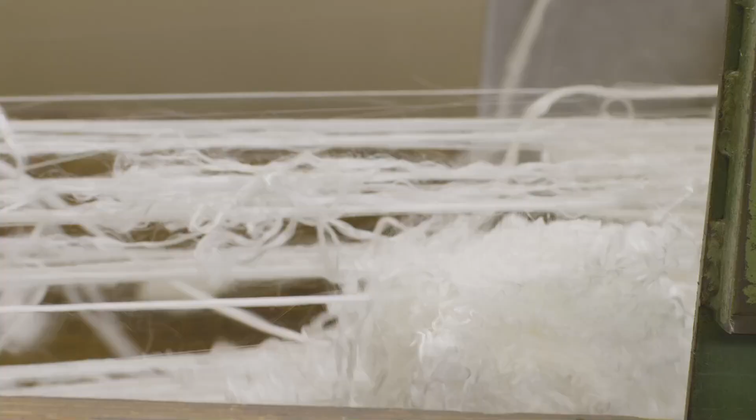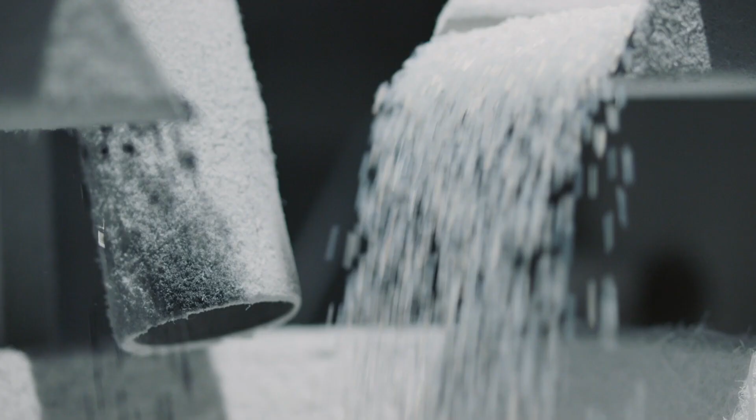Here at RadiciGroup, sustainability is right at home. All the activities of the RadiciGroup specialty chemicals, high-performance polymers and advanced textile solution business areas are carried on with full respect for the environment, people and communities. The group has a worldwide presence with 3,000 employees and more than 30 production and sales sites that produce materials for numerous markets, including automotive, electrical, electronics and textiles.

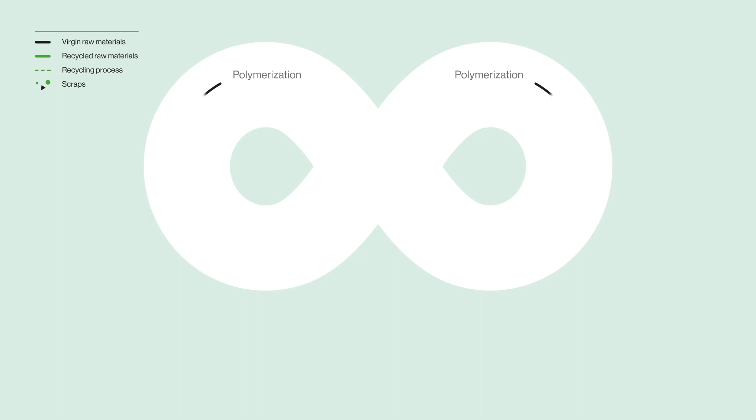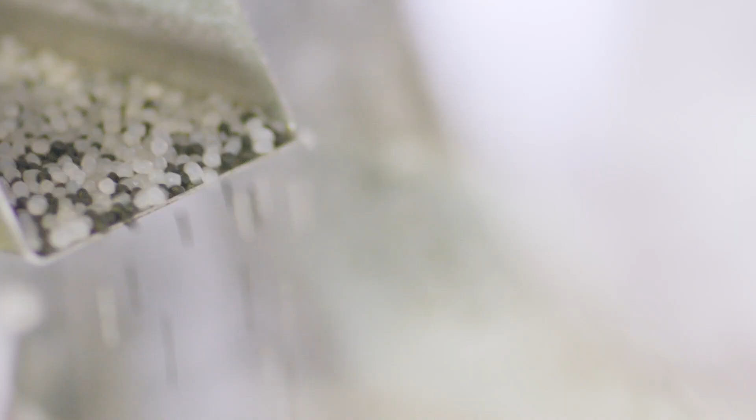Every single day, we work hard to make the circular economy our business model, by optimizing processes, reusing scraps, and promoting recycling, and we always measure our performance. Through our annual sustainability report, we publish on our economic, environmental, and social performance in a transparent and objective way. In the last 10 years, we have reduced energy use by 17.5%, CO2 emissions by 61.5%, and water use by 8.6%. And we're not going to stop here.

We will continue to team up and optimize supply chain synergies for a circular and sustainable future. And that's why we are part of the European Car EService project.

The Car EService project has received funding from the European Union's Horizon 2020 program. The goal of our project is to develop innovative circular economy business models for the automotive industry. In particular, we have focused on reuse, recycling and regeneration of some key components coming from end-of-life vehicles.

RadiciGroup high-performance polymers is the only producer of engineering polymers participating in the Car EService project, which is coordinated by the National Research Council of Italy.

We have performed quantitative feasibility studies on polyamide recovered from automotive components. The parts have been dismantled from the end-of-life cars, properly treated and then recompounded.

The aim of the project is to produce engineering polymers using secondary raw material obtained from the end-of-life parts and to obtain the performance comparable to that of engineering polymers made with virgin raw materials. Potential uses include high value-added engineering application with high end-of-life recyclability.

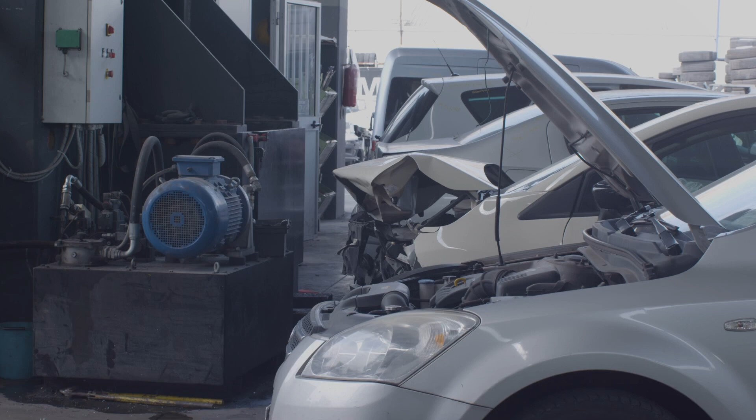The first step was to identify the components to be tested for recovery. We had to find the right compromise between polymer quality, dismantling ease, cleanliness, and the need for metal parts separation. Our choice fell on airbags and wheel covers, both of which are made from polyamide.

To validate the process and determine if it could be used for other thermoplastic polymers, we also considered rear wipers and door handles, which are components made primarily of PBT and PET polyester polymer.

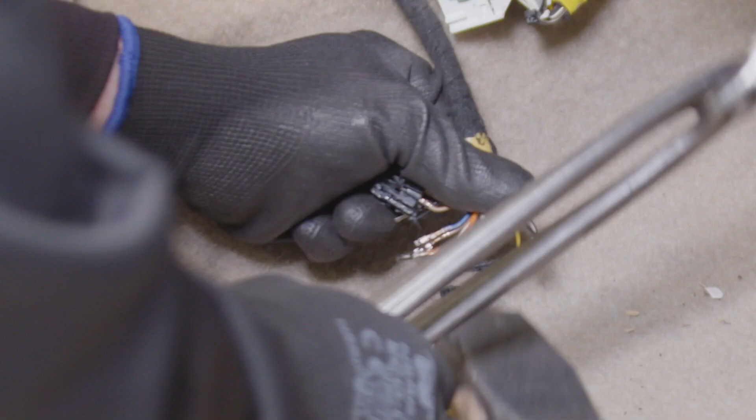Then, to handle the dismantling and stockpiling of the selected components, we hired Pollini, a company in Brescia. Pollini is a specialist in the dismantling of cars and a partner of FCA Stellantis, another group participating in the Car EService project.

Airbags are dismantled using a device that detonates the explosive charge to release the gas inside the airbag. Next, the dismantler takes the airbag out of the vehicle and places it in a special container.

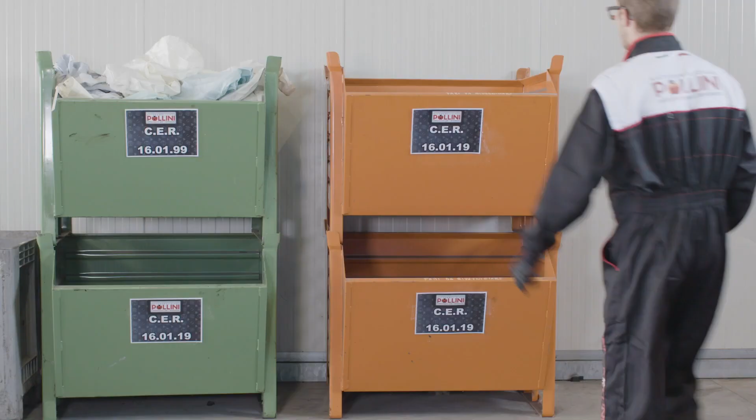The other components are taken apart manually and also placed in special containers. Then, the components removed from the vehicle become the material from which the post-consumer recyclate will be recovered.

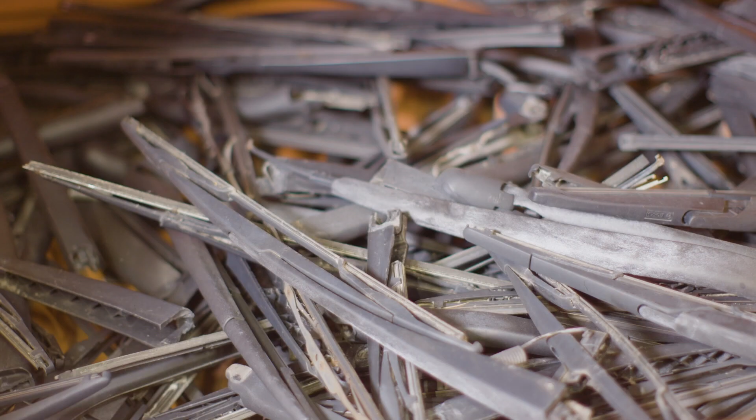A total of 1,000 kg of airbags, 1,000 kg of wheel covers, and 50 kg of rear wipers and external door handles were collected.

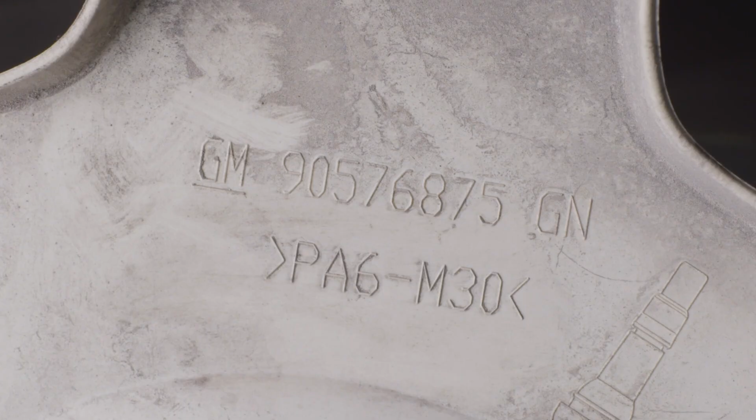The next stage is to sort the components according to the type of polymer. The composition is indicated on the part marking. Airbags are made of 100% polyamide 6,6 fabric, but wheel covers can be either polyamide 6,6 or polypropylene. Both are reinforced with glass fiber and mineral fill.

External door handles and rear wipers are usually made of glass fiber reinforced polyesters. The recycled components are cleaned of metal parts, then washed with pressurized water and degreasing detergent, and finally dried. Grinding is the last pretreatment process needed to make the material ready for recovery.

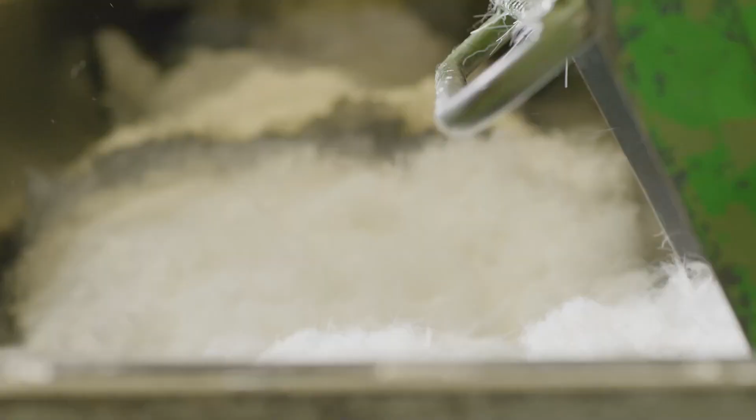Now, an industrial process enters the picture to manufacture the post-consumer recycled engineering polymers. The group can count on a production plant that is 100% dedicated to the production of sustainable, high-performance engineering polymers. Here, the circular economy concept has been implemented for years, and 100% renewable source energy is used to power production.

The material, ready for recovery, is stored in the raw material warehouse. From here, material samples are taken for quality control.

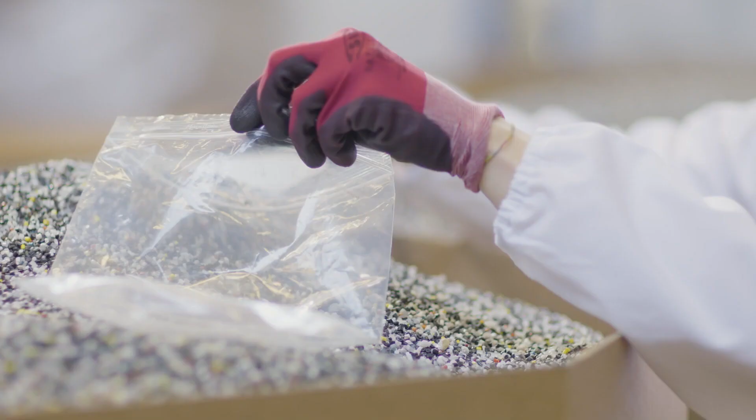Material characterization is performed to determine the type of polymer, its viscosity, the reinforcement material content, and the humidity. These characteristics are analyzed to select the optimal process condition to obtain secondary raw materials.

Based on the properties of the input material, a new material is formulated. This means our recipe is created with all the needed ingredients: the percentage of polymer, the type and percentage of reinforcement fill, and the additives. The objective is to obtain a product that meets the function and performance requirements.

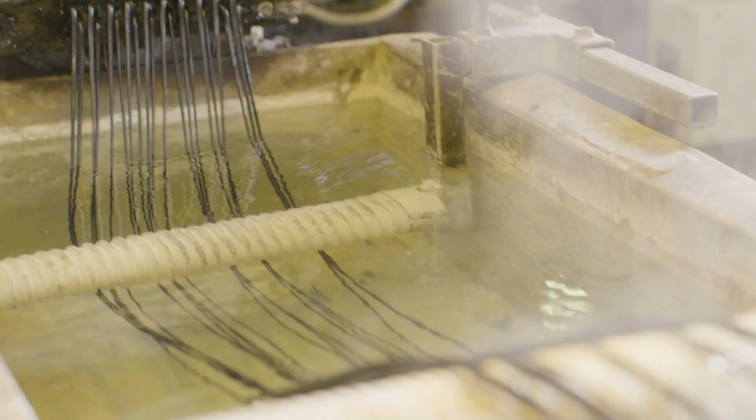This formulation is done by the specialized engineers and technicians of the RadiciGroup Research and Development Department. Regarding the airbags, we have also determined the types and quantities of additives to be added to the base polymer, taking into account the presence of silicone on the airbag fabric.

Silicone is not compatible with polyamide, and thus it is necessary to dilute the percentage of silicone by running a preliminary extrusion of the material.

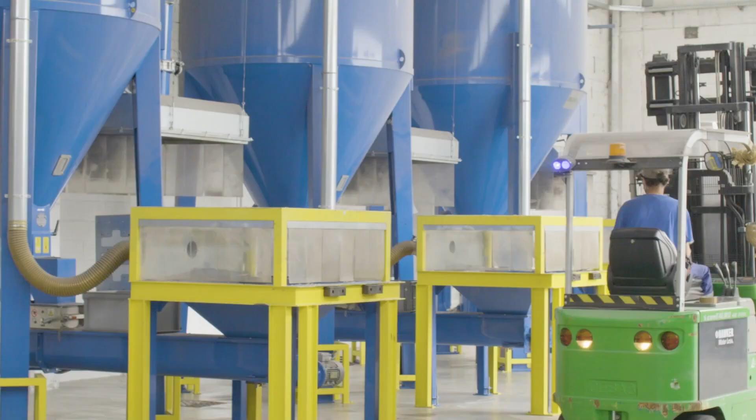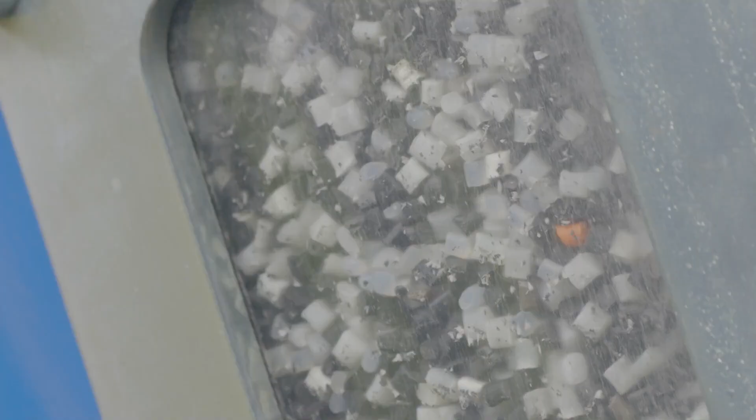The first stage of the production process is mixing. The polymer bases are loaded into silos and mixed with a mechanical system to homogenize the material. This ensures the quality and consistency of the chemical and physical properties of the finished materials.

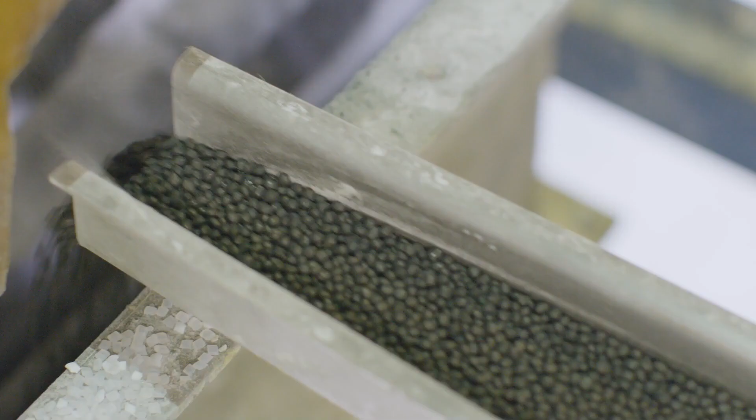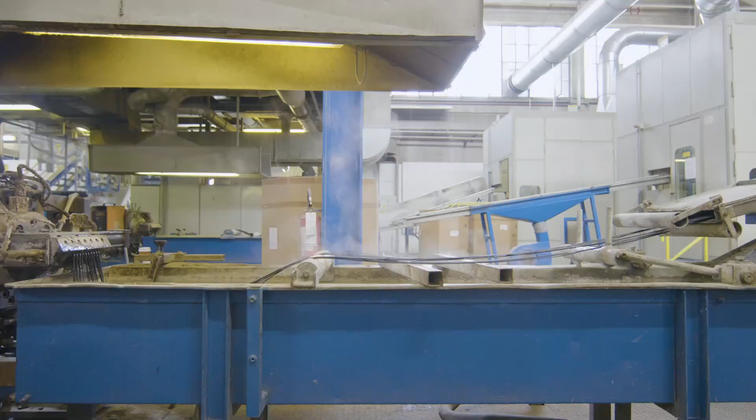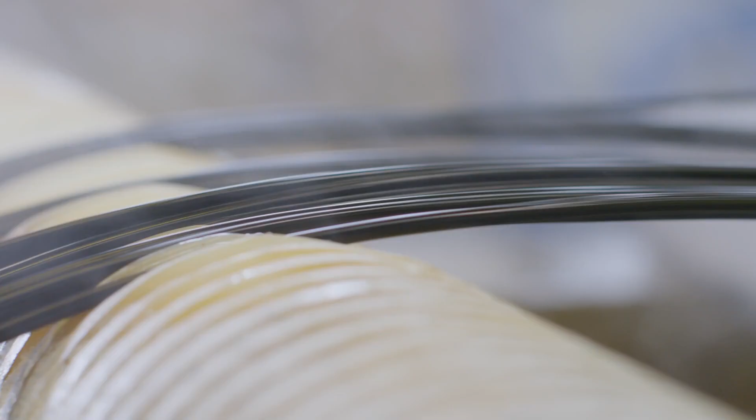The polymer mix is transported by pneumatic systems to the dosing units positioned above the extruder. According to the formulation, the dosing units feed the polymer, additives and reinforcing materials into the extruder, where they're all mixed together. In the extrusion process, the materials are forced through small holes to form threads or spaghetti.

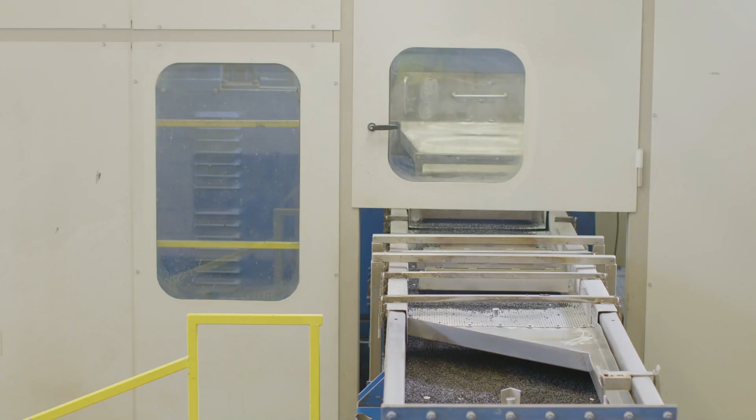These are then cooled in water baths, dried, and cut into small cylinders called chips. Next, the chips are transferred into storage silos, where they remain until they are packed.

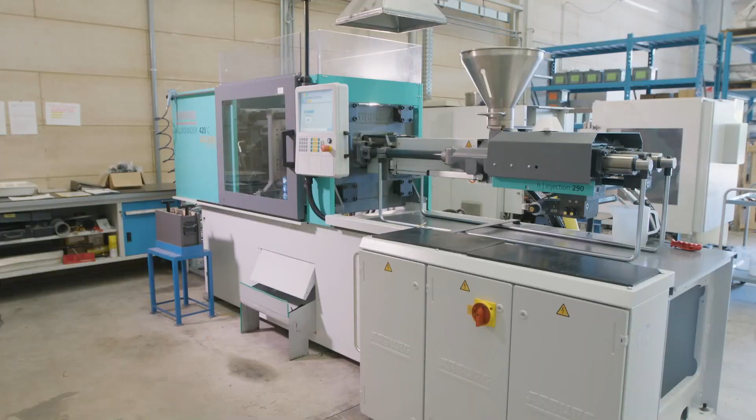Our laboratories perform two main kinds of activities. Firstly, analysis of the finished product for quality approval and release of the product for sale. Secondly, characterization of the physical, chemical and mechanical properties of the material and the preparation of a technical sheet, which can be used by end-user developers.

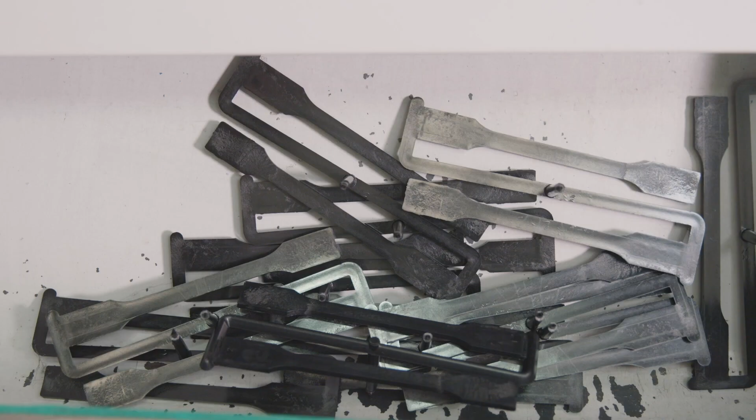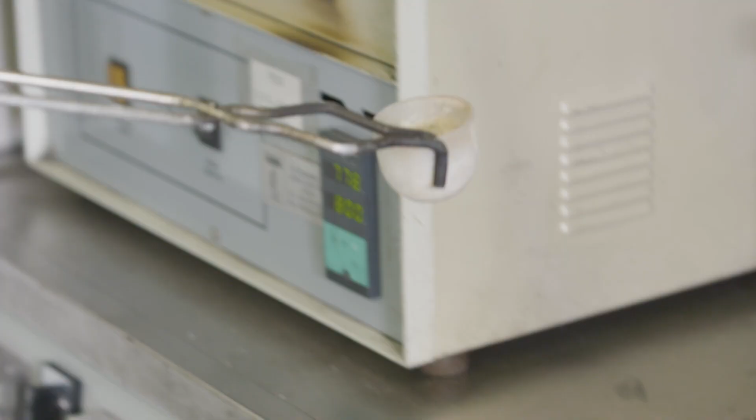Testing is performed directly on chips or on standard specimens, which are prepared by injection molding. Tests carried out are testing for residual moisture content in granules, analysis of ash content to determine filler content, and characterization of mechanical properties: tensile, flexural and impact strength.

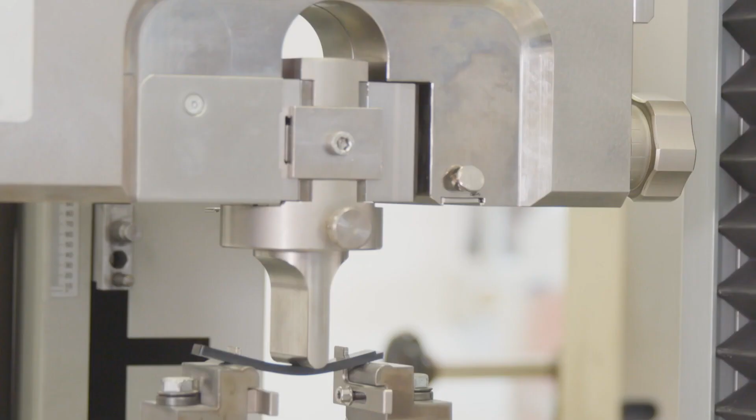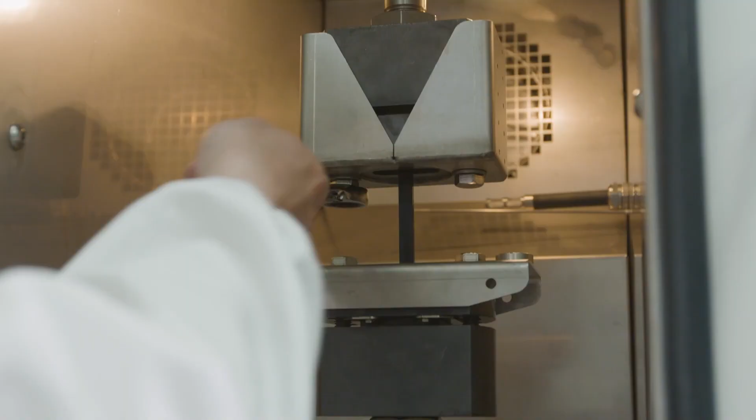For the EService project, we have equipped our laboratories with a new test instrument for fatigue characterization of materials. Fatigue testing is performed by subjecting the specimen to a variable load until failure occurs, taking into account the number of cycles.

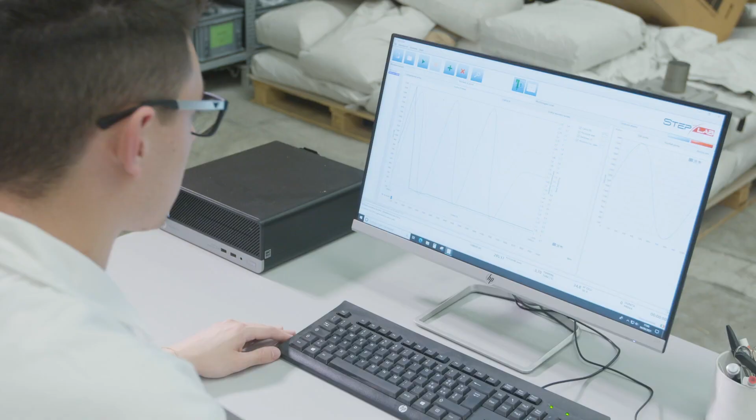After passing quality control, the materials produced are transferred to the packaging area. Packaging options are bags, octobins or tanks.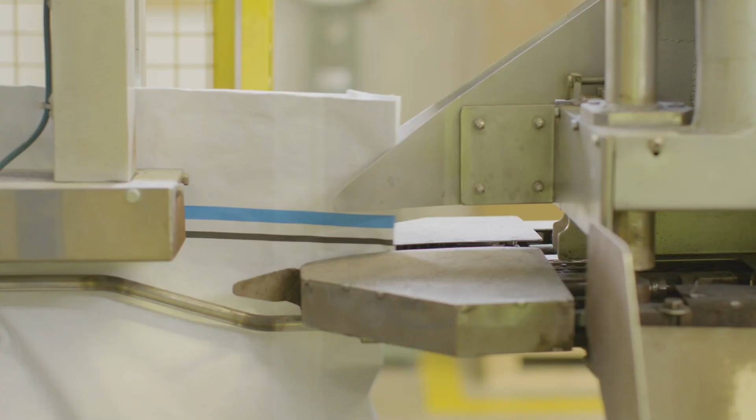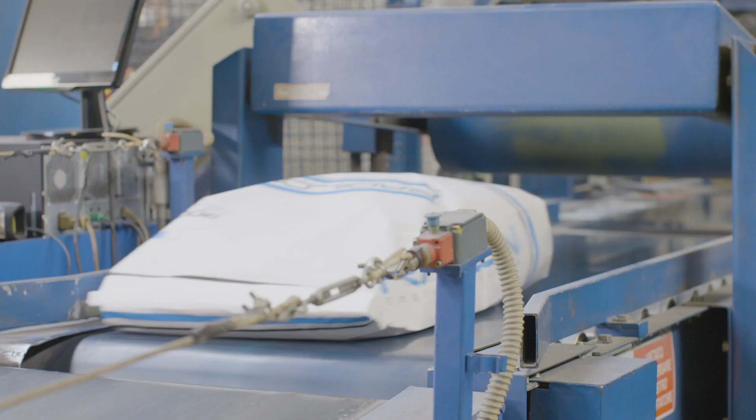Bag packaging is a fully automated process. The bags are hermetically sealed to prevent the escape of granules and to protect the material from moisture. The bags are then stacked on pallets and shrink-wrapped, ready for shipment.

RadiciGroup formulates, produces and characterizes engineering polymers so that its customers can process them into products with specific functions and performance requirements. There are many different processing technologies, application sectors and intended uses.

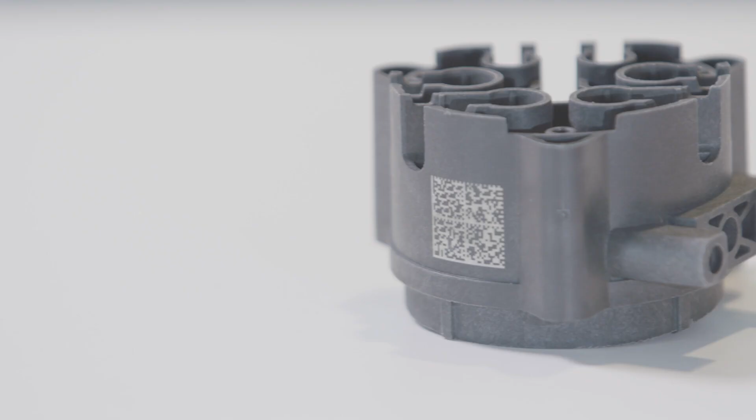For the EService project, we consider two processing technologies. The first is injection molding, a classic technology for engineering polymers, which involves injecting the polymer melt under high pressure into steel molds that are held tightly closed by a press.

The other technology is 3D printing, which offers almost total freedom in creating complex shapes without fixed costs for tooling, such as molds or the like.

With the cooperation of some of our customers, a number of products were selected to test the processability and performance of the materials obtained from post-consumer recycling.

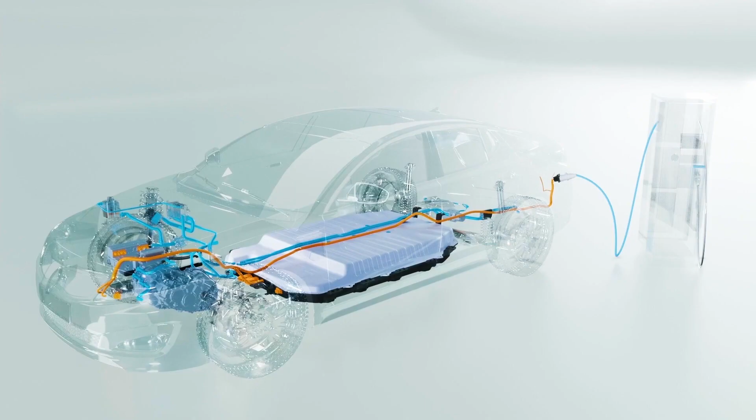The products manufactured for the EService project include both electrical device components and automotive parts, for applications such as charging connectors for electric and hybrid vehicles, as well as mechanical components specifically developed to carry out validation tests.

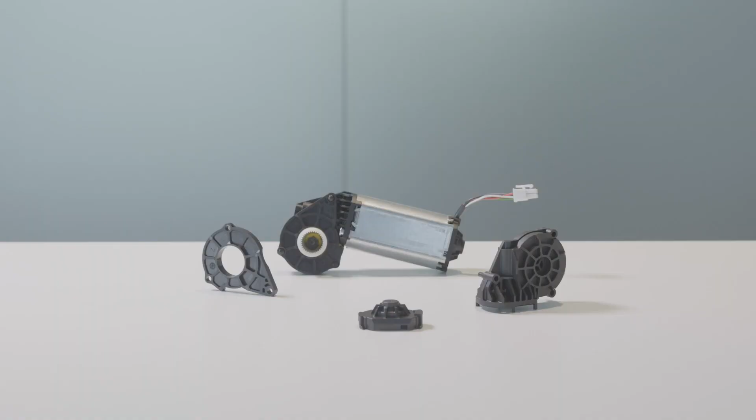The processing of the material and the use conditions under which the end product will operate during its life cycle are aspects of a complex puzzle. To work well, everything must be carefully designed and rigorously checked. This will ensure that the delicate balance among the parameters is preserved.

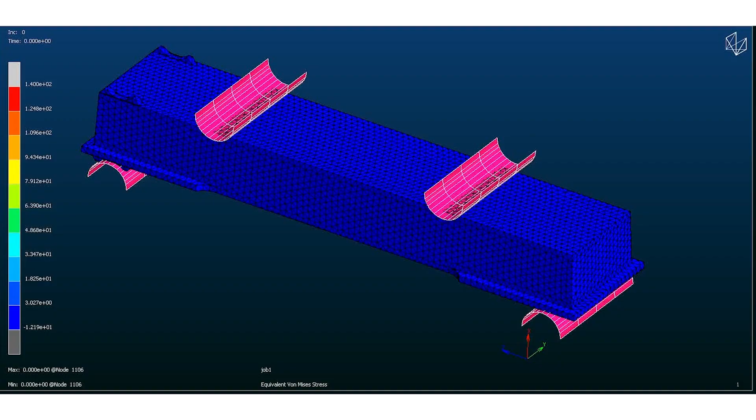A useful tool for designers is CAE, Computer-Aided Engineering, or in other words, numerical simulation assisted by software. CAE aims to virtually reproduce both the material molding process and the mechanical, thermal or other kind of solicitations that the part will be subjected to under use conditions.

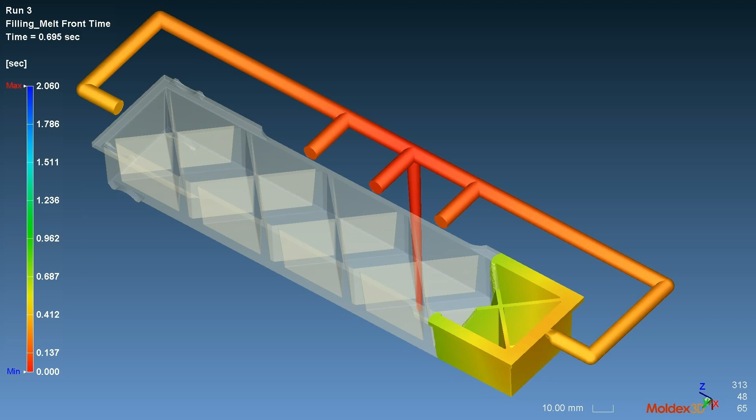Everything possible is done to predict the behavior of the materials, right from the very early stages of product development. The goal is to identify and anticipate potential problems, select the material best suited to the application, and more generally, optimize the design. This process can also take into account eco-design and environmental performance.

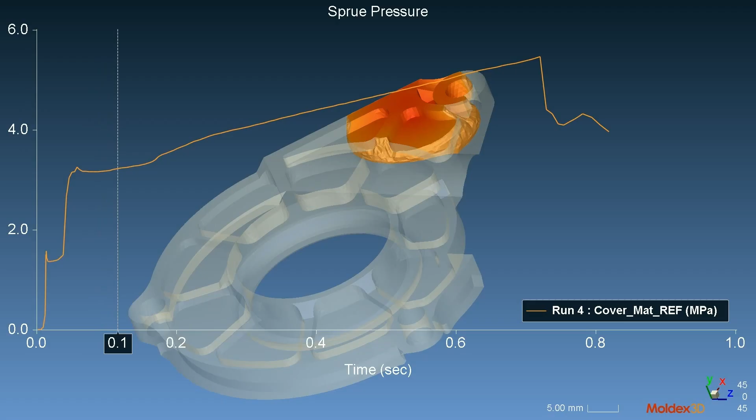Material characterization is essential for accurate prediction, especially in the case of recycled polymers, which are subject to greater variability. Simulation allowed us to virtually reproduce the molding of various sample components and to carry out a subsequent validation, so as to confirm that the selected recycled material was indeed suitable for the application.

We then gave the green light to further experimentation on physical prototypes.

Thanks to the European EService project in the automotive sector, we are able to work more in depth on recycling, circular economy and sustainability.

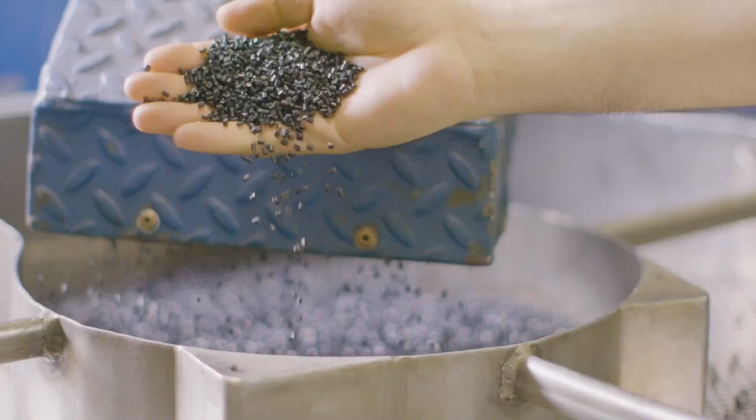The EService project showed how teamwork among the various players in the supply chain is a winning strategy for a more sustainable future.

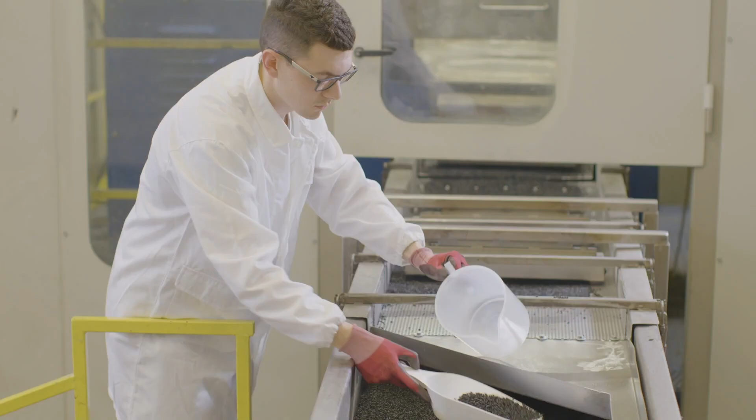RadiciGroup's expertise in the formulation and production of engineering polymers made possible the evolution toward higher technical and environmental performance of recycled materials.